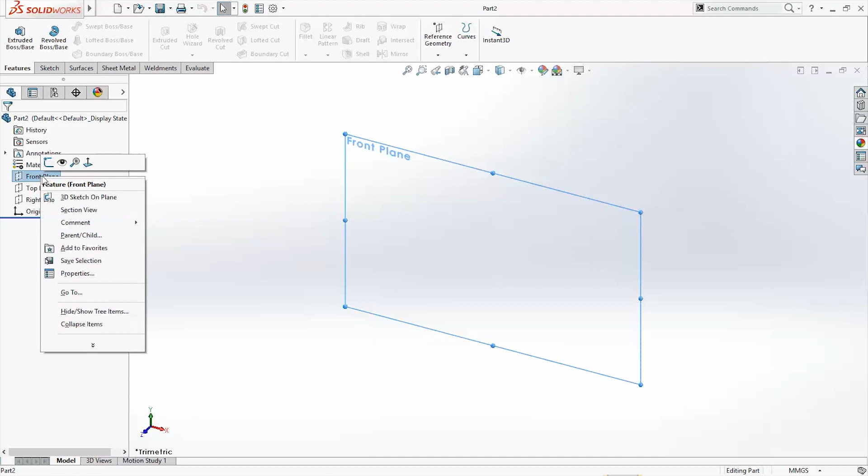Open new SolidWorks document and start to sketch on front plane. First we will make one cylinder, that will be 50 millimeters, and we will exit the sketch. Go to Features, use command extruded boss base and make it 60 millimeters. Click OK.

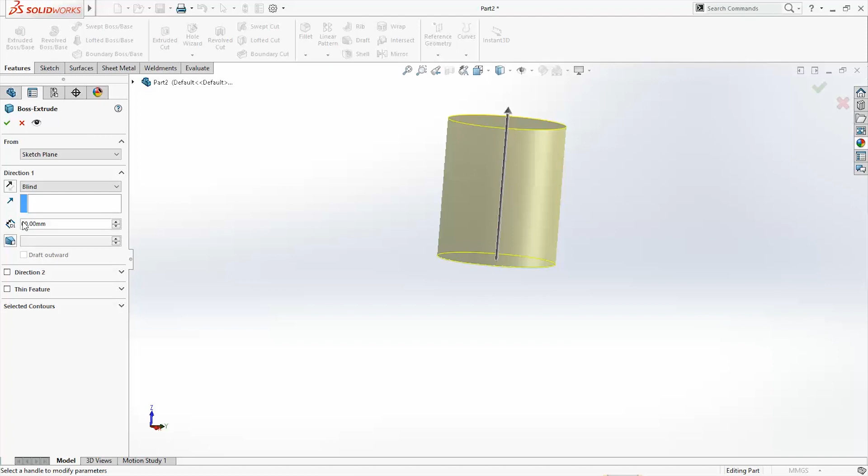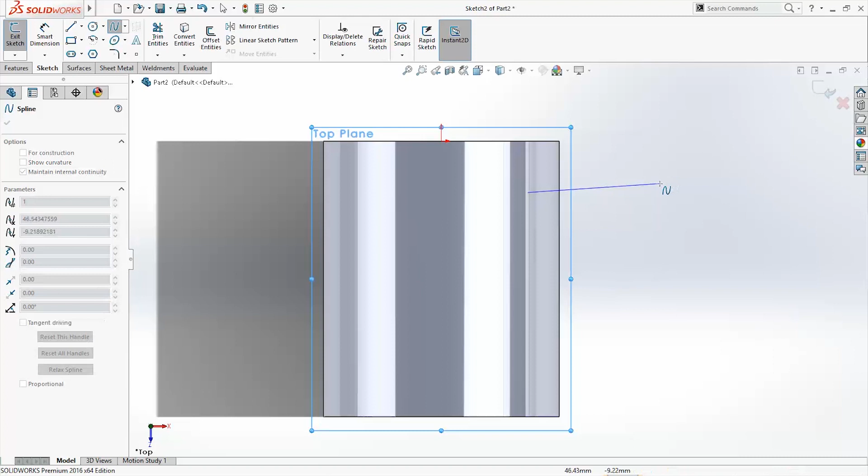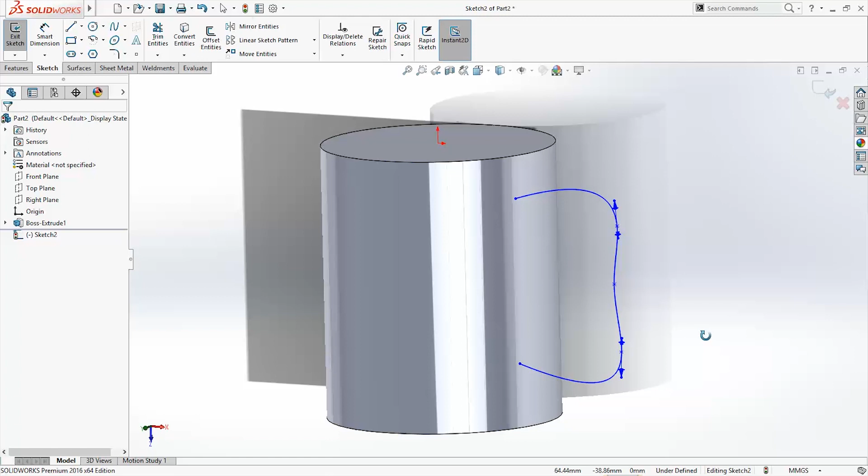Now we will draw on top plane. Go normal to top plane, right click and use command normal to, and start spline. That will start from here. Click escape button on keyboard. Move the points a little. That's okay, and exit the sketch.

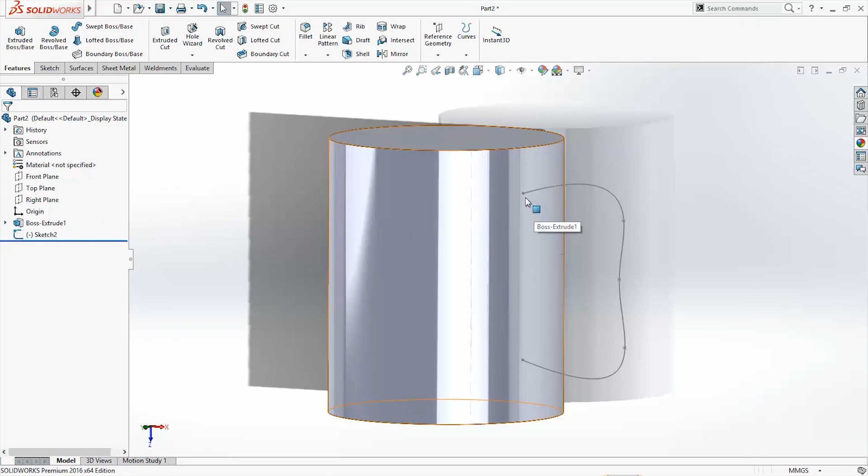Now I want to make the profile sketch that will follow this line. To do that, we have to create the profile starting from this point. To sketch from the start of this point, we have to create a new plane. Go to reference geometry, plane. For first reference, use this point, and for second one, use the spline sketch. Click OK.

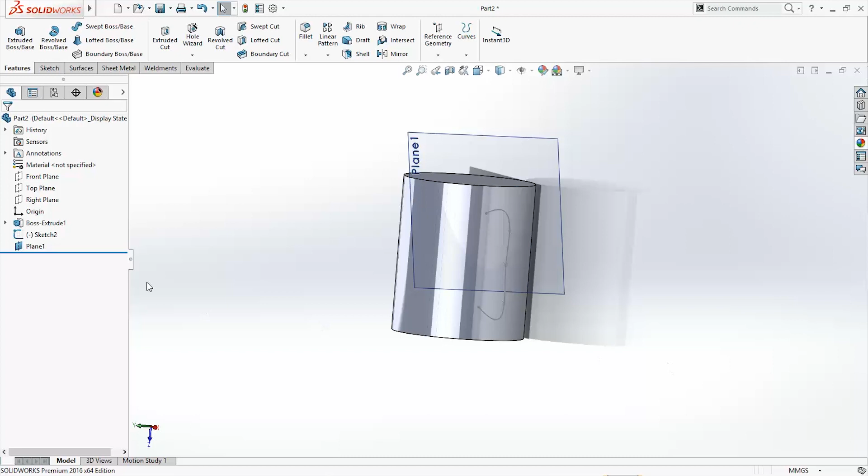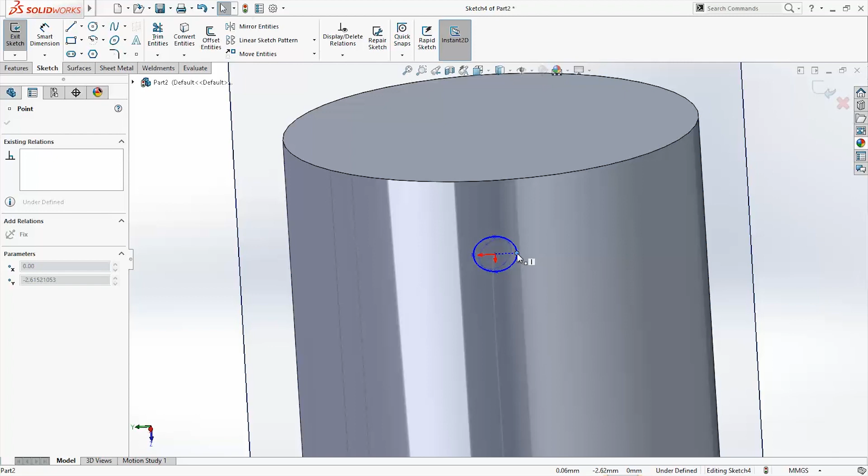Now sketch on plane 1. Use command to create ellipse and start from this point here. Click OK. You can modify the ellipse from these points here. That's okay. Exit the sketch.

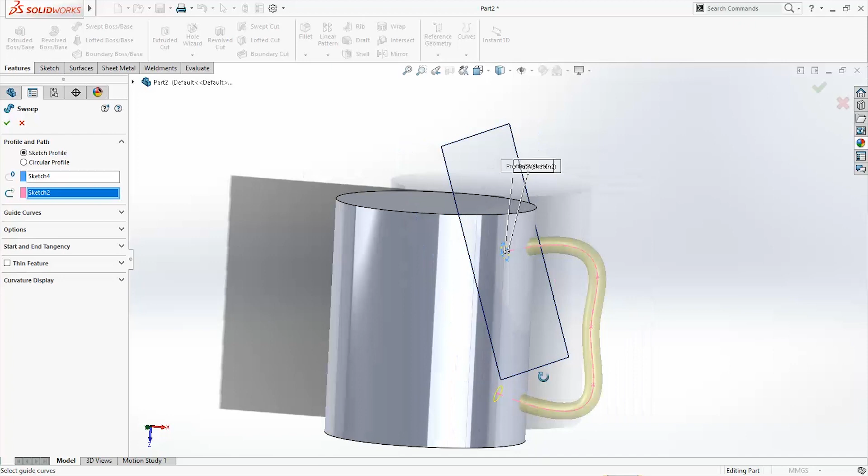Now we will use sweep boss base command. Use sketch 4 for the profile of the path, and this line for the path that will follow our profile. And here is our holder for the cup.

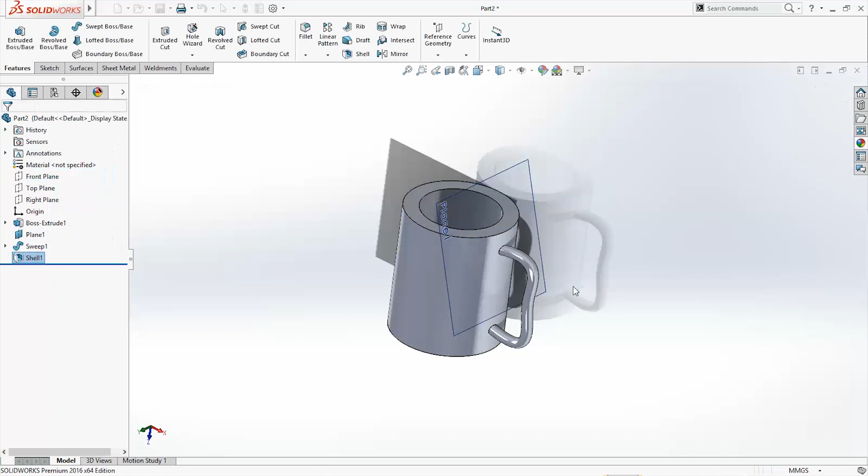Now use command shell, 7 millimeters, just on this face, and click OK. 7 millimeters is too much, maybe 3.5 millimeters. That's better. Then we'll use fillet.

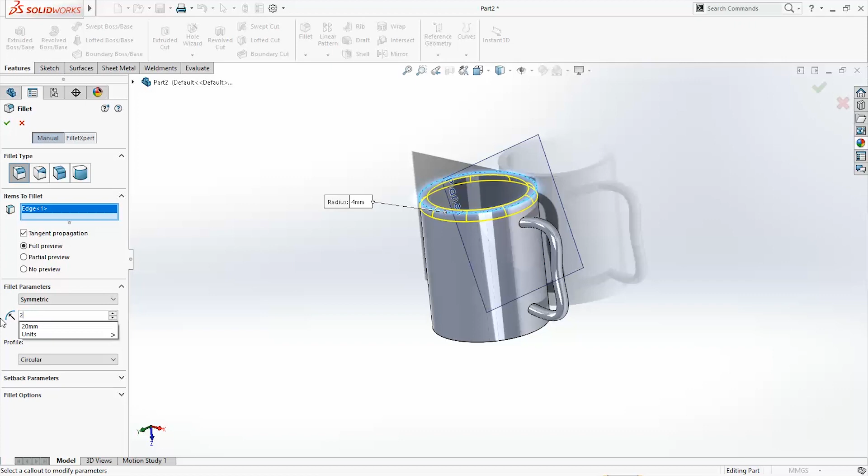I want it to be 4. Let's see... 2. Okay, 2 millimeters. And another thing that we are going to do is to create a sweep cut on the outside face.

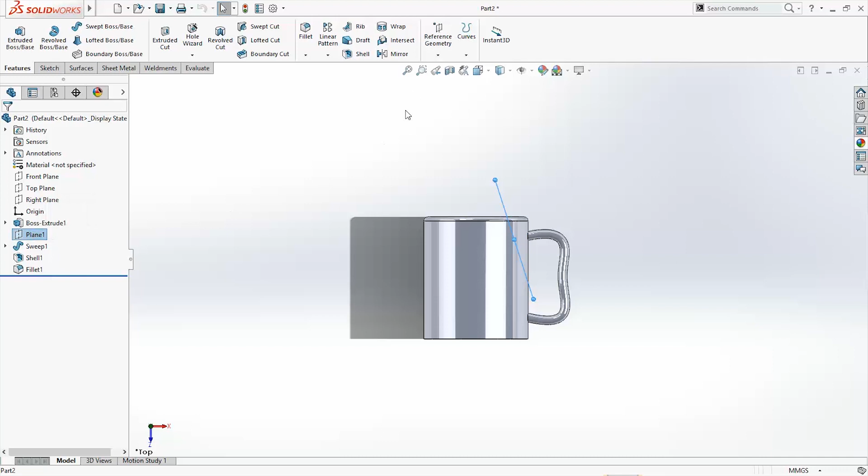To do that, we need to create one line, but before creating the line, we're going to hide this plane and create a new plane that will be tangent to this face here, and it will be parallel with plane top. Parallel, and click OK.

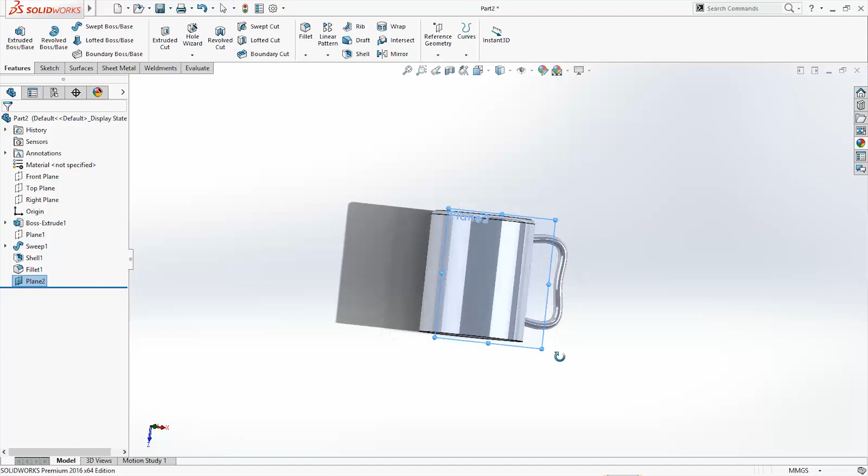That's okay. Now we are going to draw one line that will start from somewhere here and will follow this path.

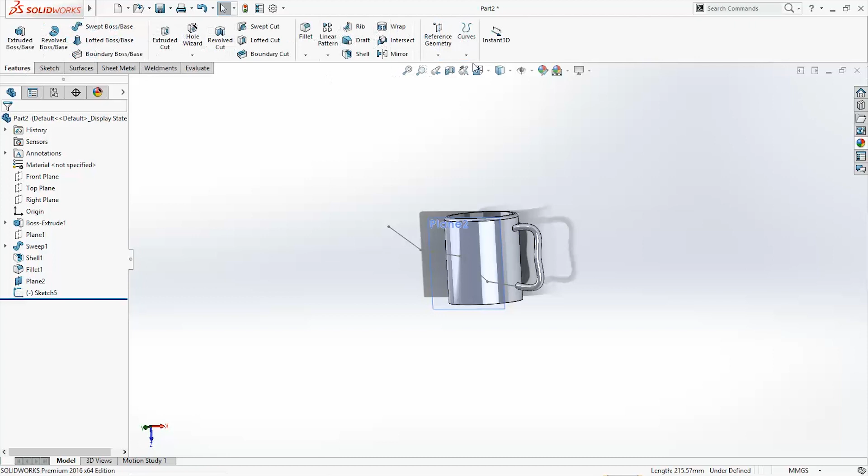Exit the sketch and use in Features command in curves, project curve. For project sketch we'll use this line, and for profile to project it will be this profile here. Change the direction and click OK.

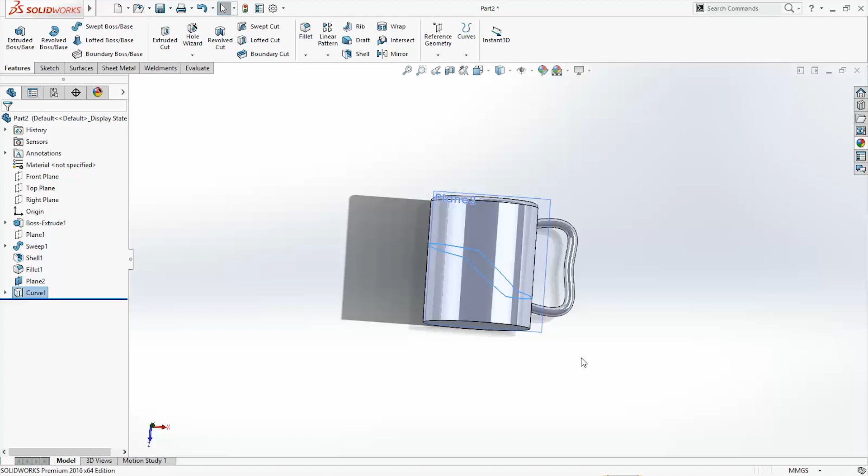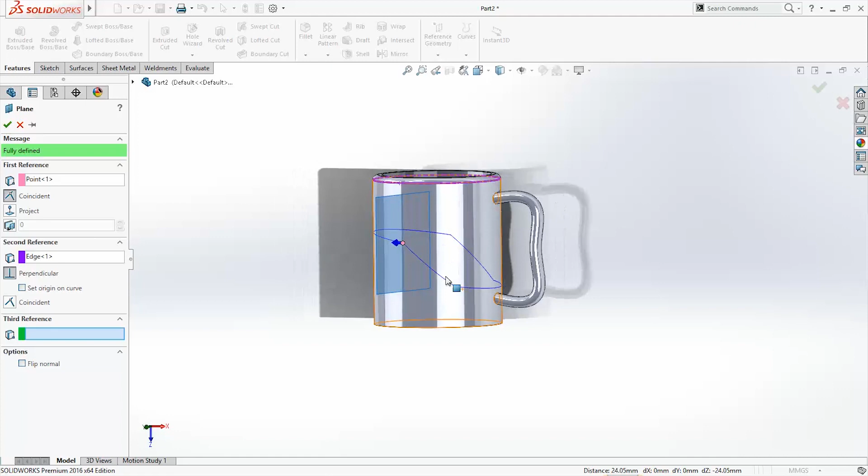Second thing that we need to do to use sweep cut is to create again another plane. Hide this one first. And again we will create one new plane that will be coincident to this point here and perpendicular to this circle here. Here is our plane. Click OK to create it.

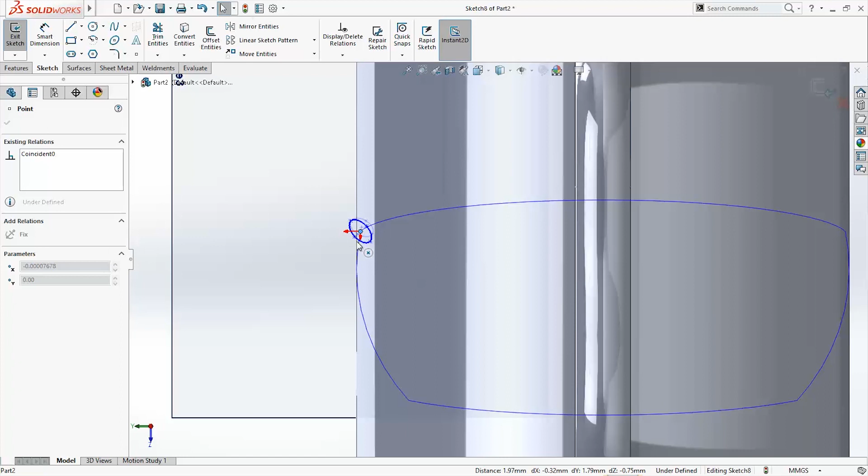Now also we'll draw the profile on this plane here. Normal to, again use ellipse, create it. This point and this will be coincident, that will be also coincident. Use the profile something like this.

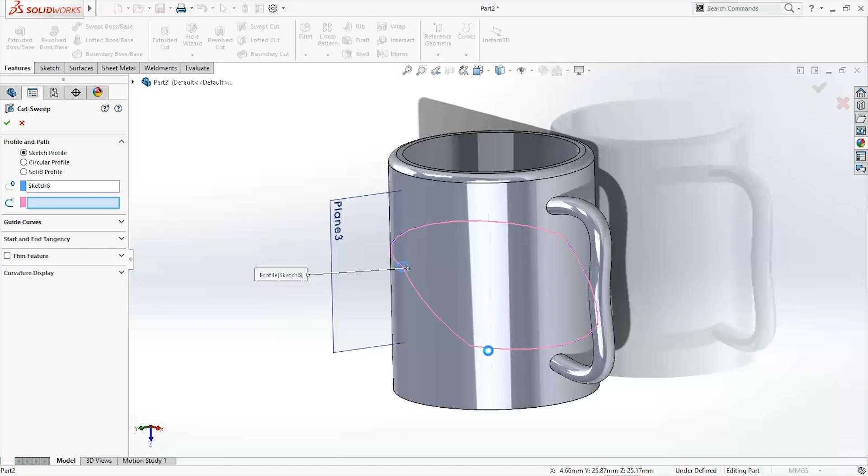Exit the sketch, and now we will use sweep cut command. For sketch profile we use this profile here, and path will be this line, and here is it. Click OK.

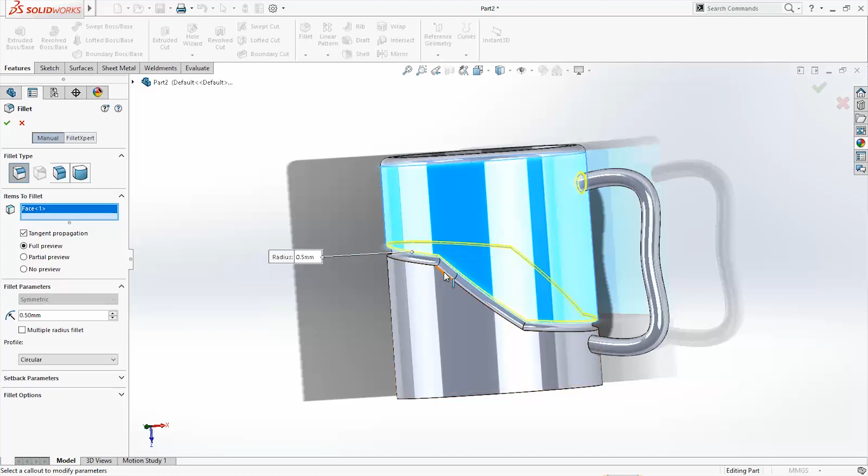Hide this plane, hide this curve. Again use fillet, 0.5, maybe... yeah, it's good. 0.5 on this line, also this line, this one is okay, and maybe this one too, and click OK.

So here is our cup. Looks nice.

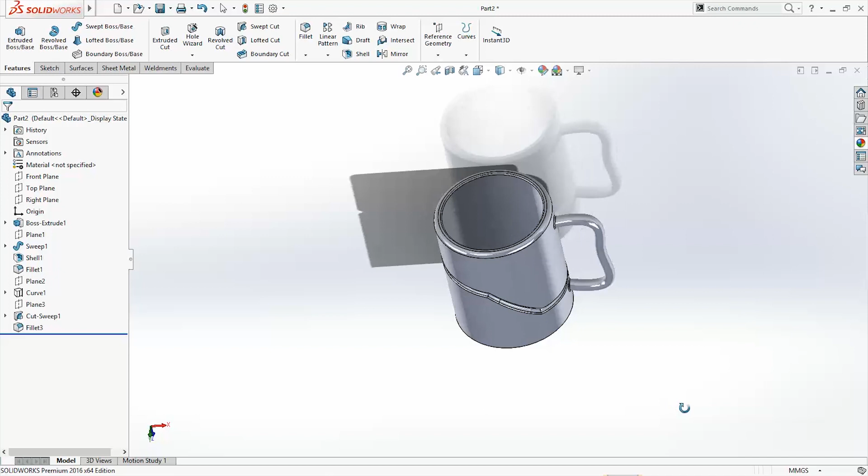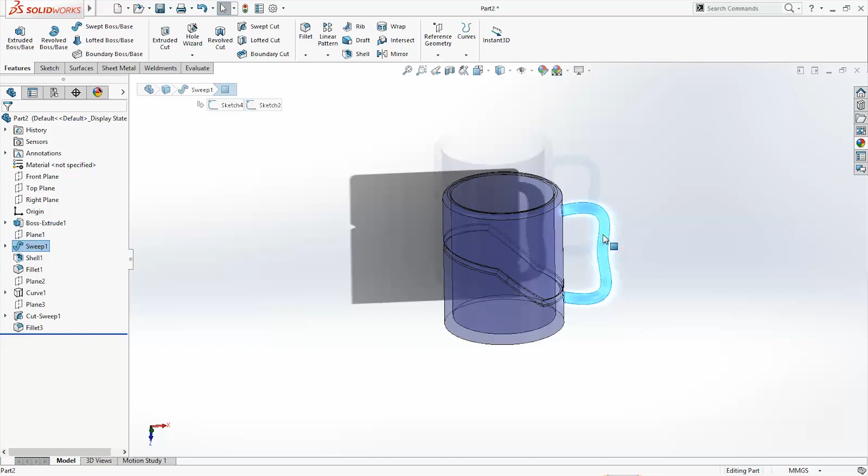We also in appearance can add material. It will be gloss maybe... Or not. Good. We can make this part here to be gloss. Sweep, gloss blue. Wow, clear gloss. Click OK.

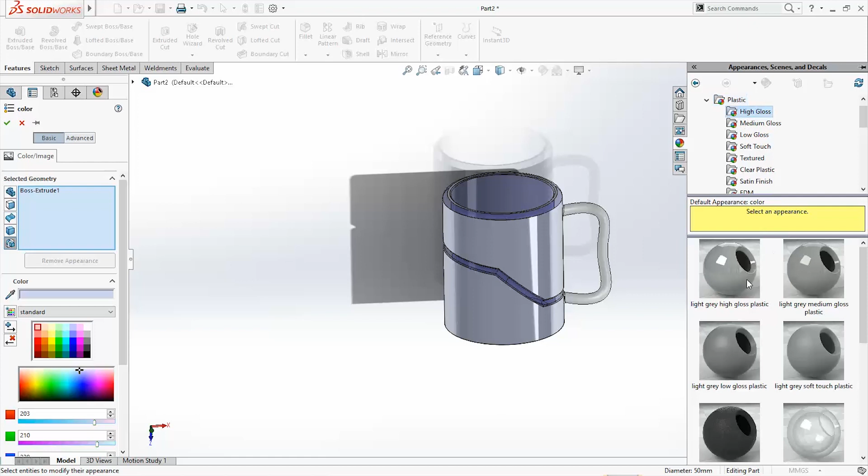And for this one, we will use appearance, plastic, red. Oops.

Also from here you can select what you want to select on the profile that you want to change the color. Here this option is for face, and I will select this face here. I will make it blue. Okay.

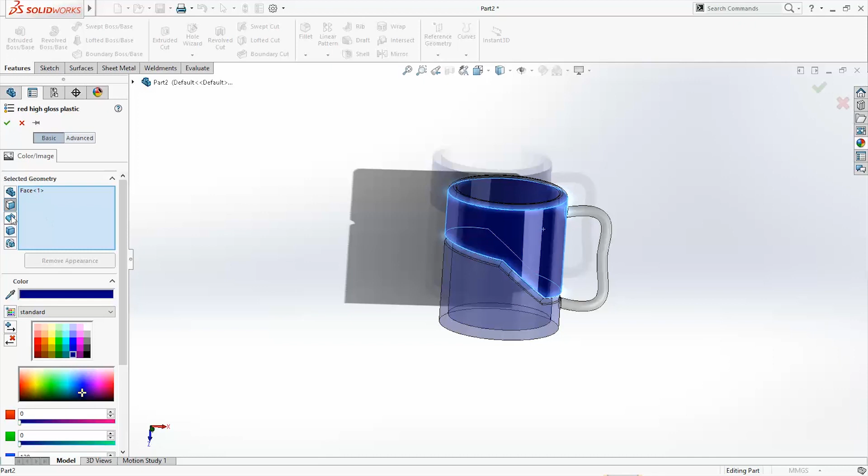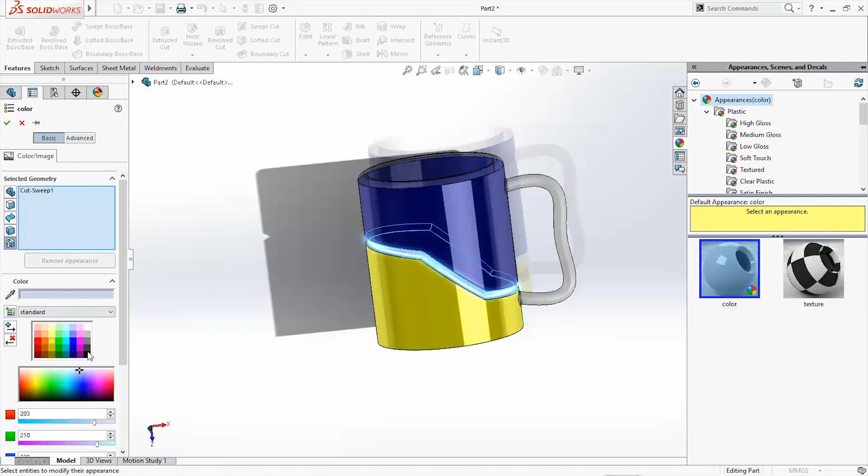This one will be yellow. Okay. For this we will add another color that will be green... nope, red. Okay.

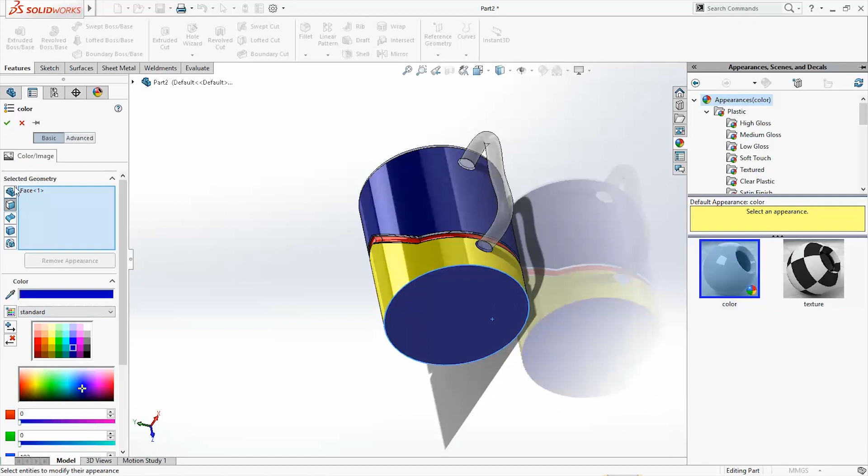We can also change the color for this fillet here. Okay, that's nice.